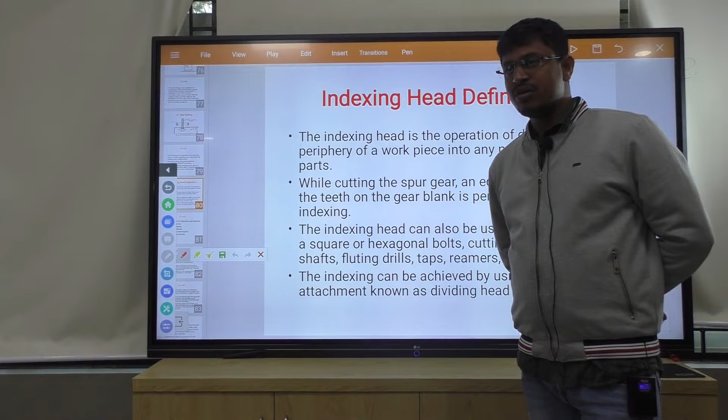Indexing method is used to divide the periphery of a workpiece into an equal number of parts. Why indexing is done, or what is indexing? Indexing means to produce any number of equal parts on the periphery of the workpiece. If we require an equal number of divisions on the periphery of the workpiece, then we go for indexing.

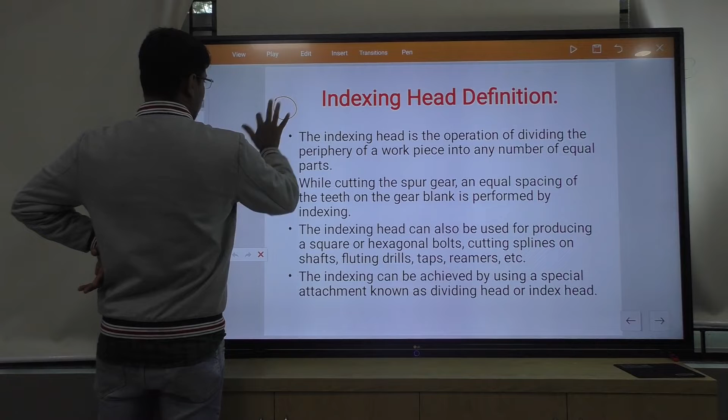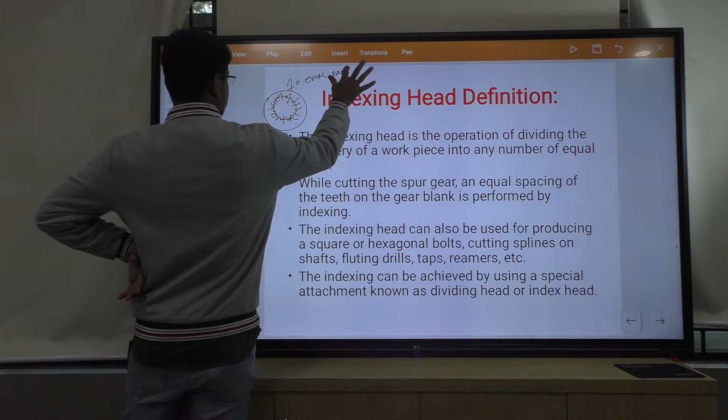The indexing head is used for dividing the periphery of a workpiece into any number of equal parts. That means if this is the circular workpiece, and we require to divide it equally, this is one part, this is one part, and so on. Here we have 10 equal parts. Equal parts means if we divide this workpiece into 10 equal parts, how should it be done?

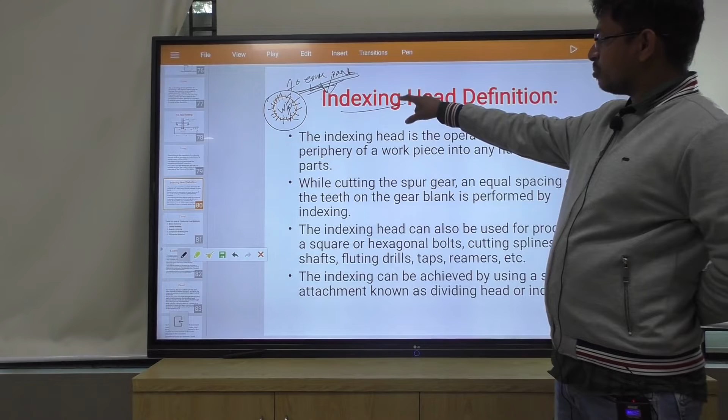By the indexing method, we can divide the workpiece surface or periphery into an equal number of parts. While cutting spur gears, an equal spacing of the teeth on the gear blank is performed by indexing.

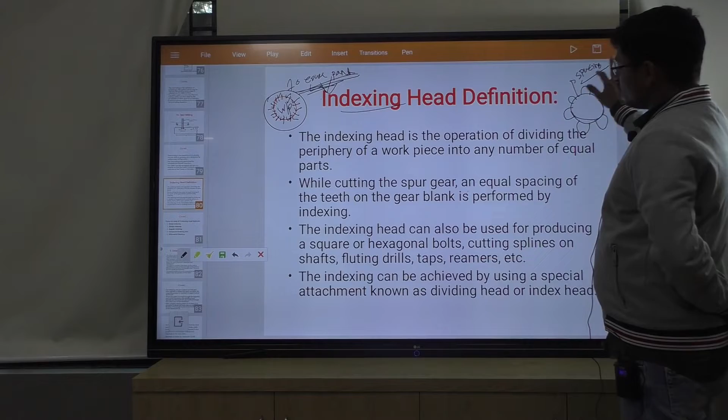Equal spacing means, if this is a spur gear and this is the number of teeth, then spacing is the gap between the teeth. The gap between the teeth is called spacing. The gap between consecutive teeth is called spacing.

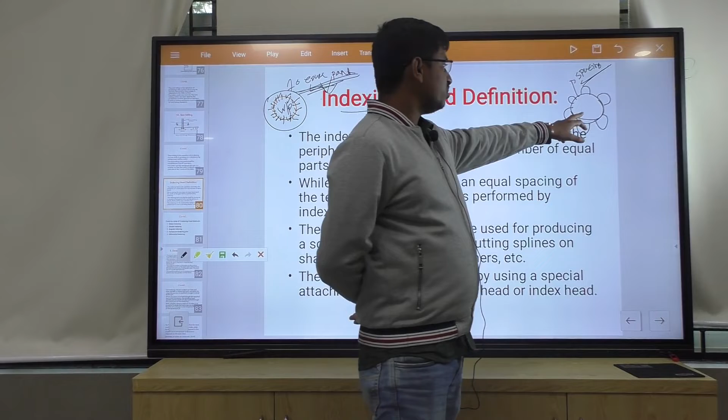In the preparation of the spur gear in milling machines, we have to divide the periphery of the workpiece, or the gap between the two teeth, into an equal number of spacings. So in this case also we have to go for indexing. The indexing head can also be used for producing square or hexagonal bolts.

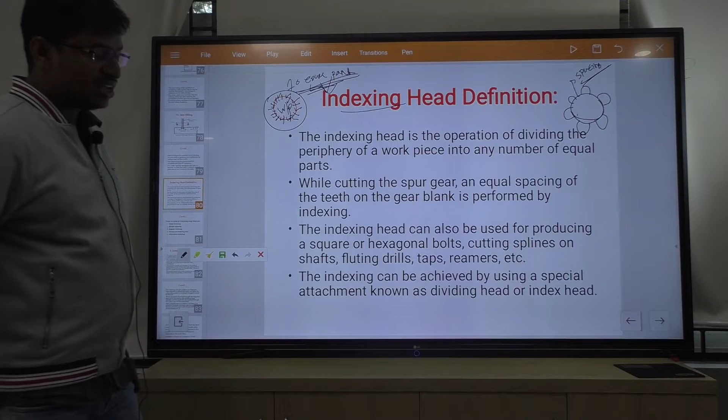It is used for cutting splines on shafts, fluting drills, taps and reamers. In this case also we go for indexing. Indexing can be achieved using a special attachment known as dividing head or index head.

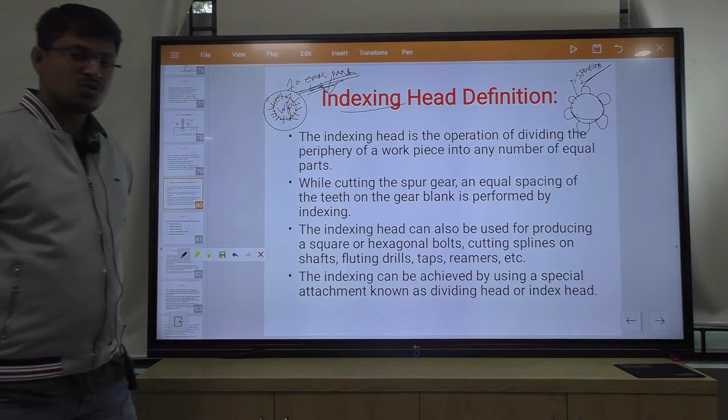We can divide the workpiece into any number of equal parts by attaching a dividing head or index head in the milling machine.

There are a total of 5 indexing methods: direct indexing, simple indexing, angular indexing, compound indexing, and differential indexing. But in our syllabus, only direct indexing, simple indexing, and compound indexing are present.

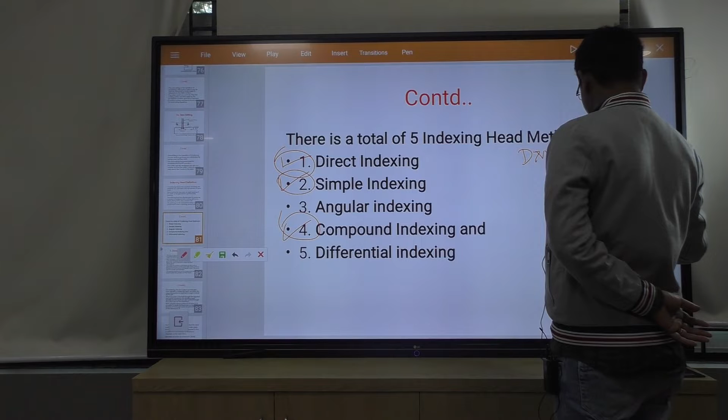For these indexing methods, we require a dividing head or index plate. The index plate is used in milling machines for dividing the workpiece into an equal number of parts.

There are 3 types of dividing head: one is the plain dividing head, second is the universal dividing head, and third is the optical dividing head.

By using this dividing head in milling machines, there are a total of 5 indexing methods: direct indexing, simple indexing, angular indexing, compound indexing, and differential indexing. But in our syllabus, direct indexing, simple indexing, and compound indexing are covered. We will discuss these one by one.

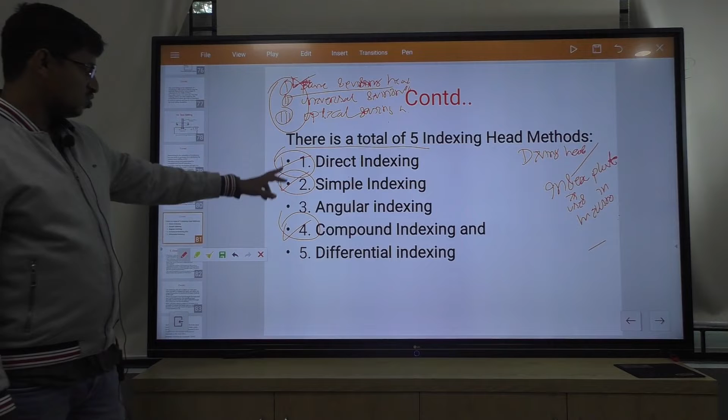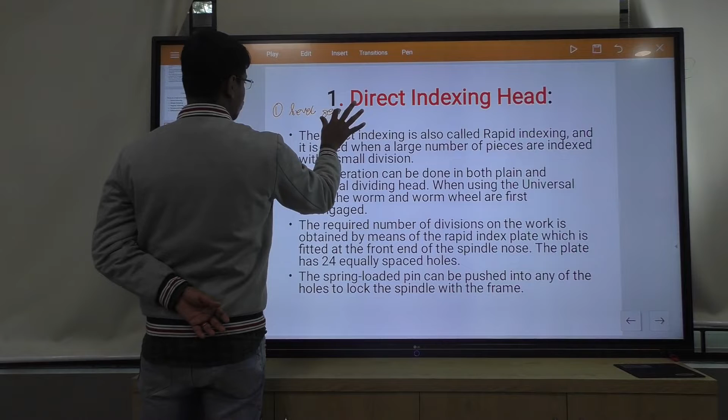Now we will see direct indexing. What is direct indexing? Direct indexing is also called rapid indexing, because in direct indexing we use a bevel gear arrangement. Direct indexing is used when a large number of pieces are indexed with a small division.

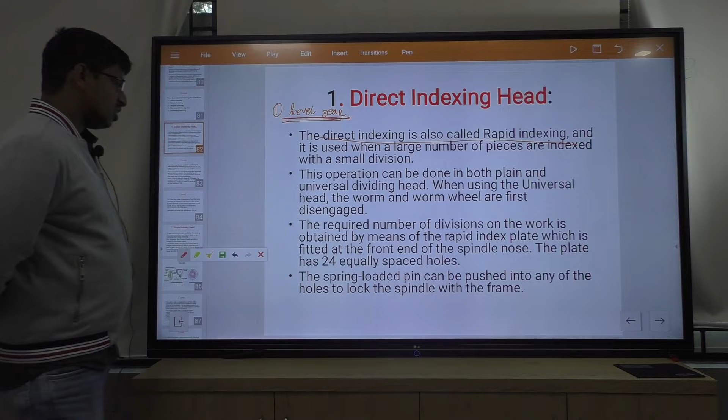These operations can be done in both plain and universal dividing heads. When using the universal head, the worm and worm wheel are first disengaged, and the required number of divisions of the workpiece is obtained by means of the rapid index plate, which is fitted at the front end of the spindle nose.

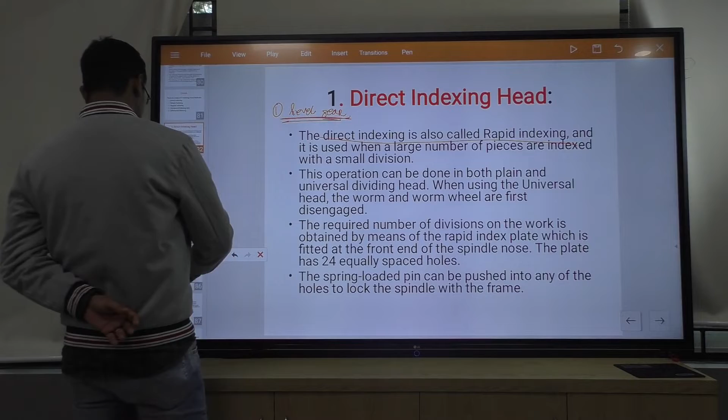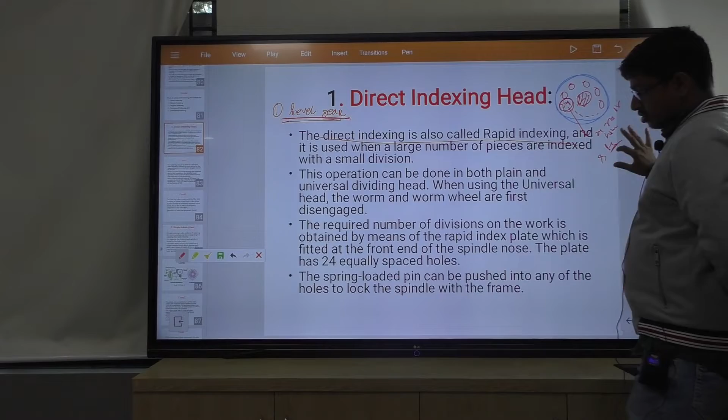In direct indexing, there is an index plate. These index plates have 24 number of holes. Simple indexing or direct indexing uses an index plate which contains 24 holes, and uses a bevel gear.

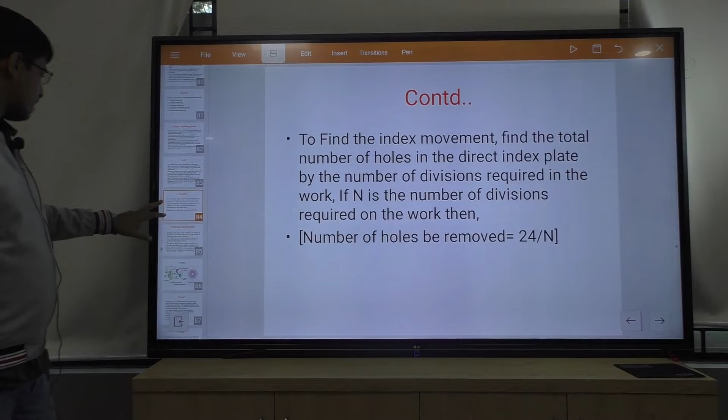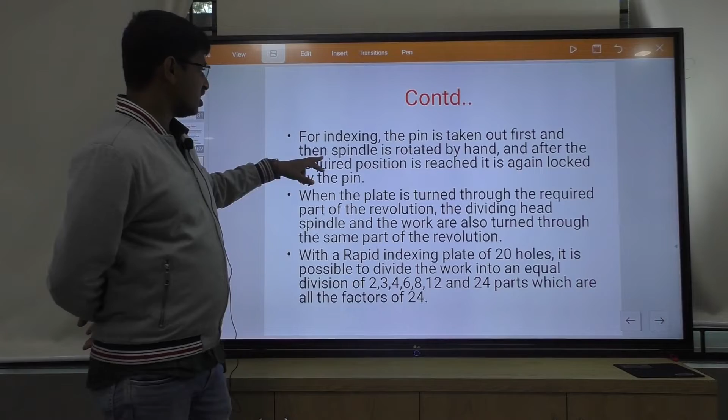For indexing the pin, first what happens? This is the index plate. What are the methods of indexing? How is indexing done in this direct indexing head? For indexing, the pin is taken out first and then the spindle is rotated by hand. This is the index plate, which contains 24 holes.

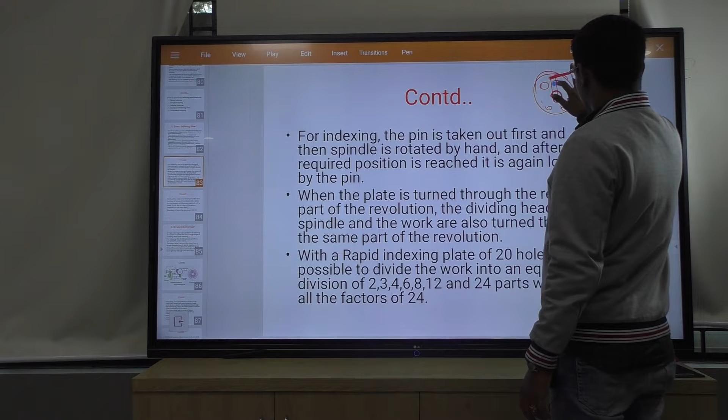And here the crank pin is present. First the crank pin is engaged with one of these holes. Then the crank pin is disengaged from this index plate and rotated by hand, and after the required position is reached, it is again locked by the pin.

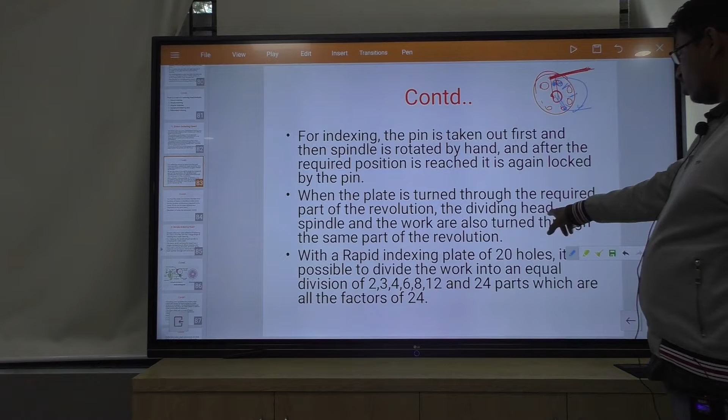Suppose we have to divide the workpiece into 3 equal parts. This is 1, this is 2, this is 3. After this rotation, the index crank is rotated and the index plate is locked in this hole. When the plate is turned through the required part of the revolution, the dividing spindle and the work are also turned through the same part of the revolution.

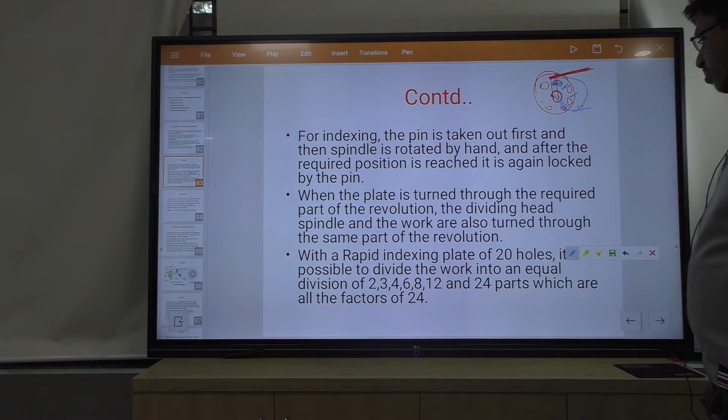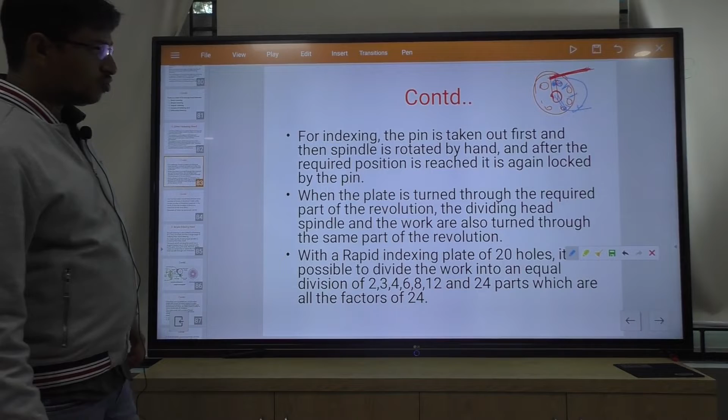With a rapid indexing plate of 24 holes, it is possible to divide the work into equal divisions of 2, 3, 4, 6, 8, 12 and 24 parts, which are all the factors of 24. In direct indexing, 24 holes are there in the index plate. With direct indexing, we can divide the workpiece into a number of equal parts that are factors of 24.

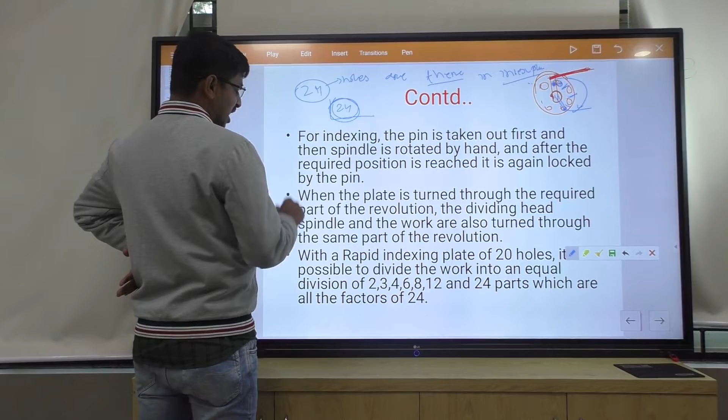What number of equal parts can we produce with direct indexing? 2, 3, 4, 6, 8, 12 and 24. We can divide the workpiece into 2, 3, 4, 6, 8, 12 and 24 equal parts by using direct indexing, all the factors of 24.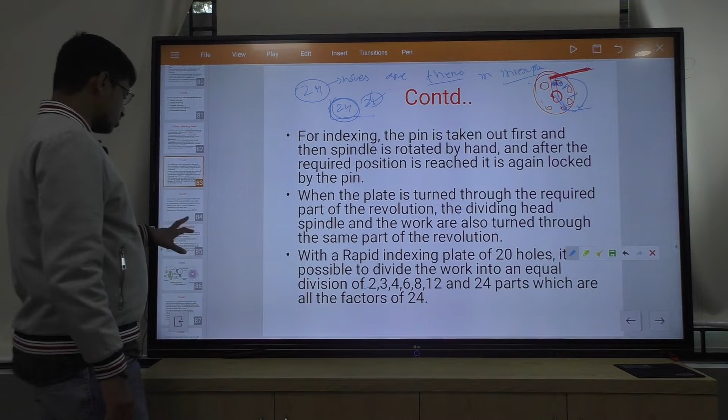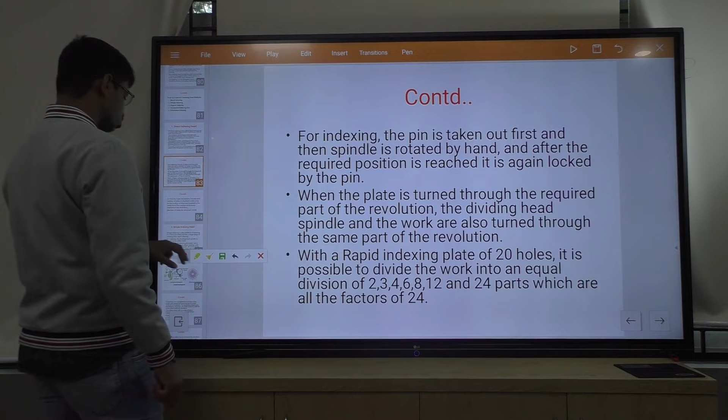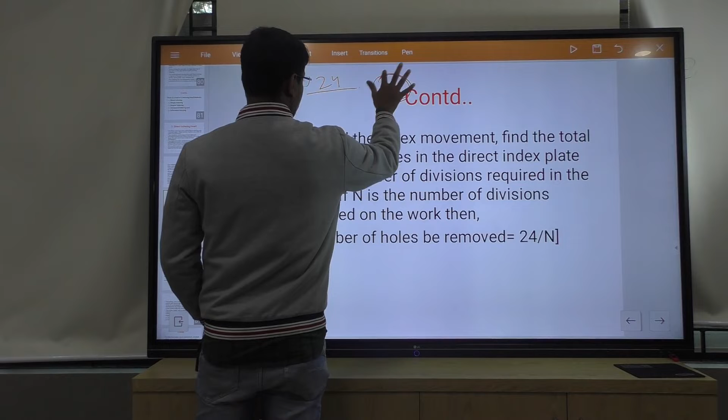Then it's simple. To find the index crank movement, divide the total number of holes in the index plate by the number of divisions required in the work. If n is the number of divisions, here we have 24, and suppose we have to divide this circle into 6 equal parts.

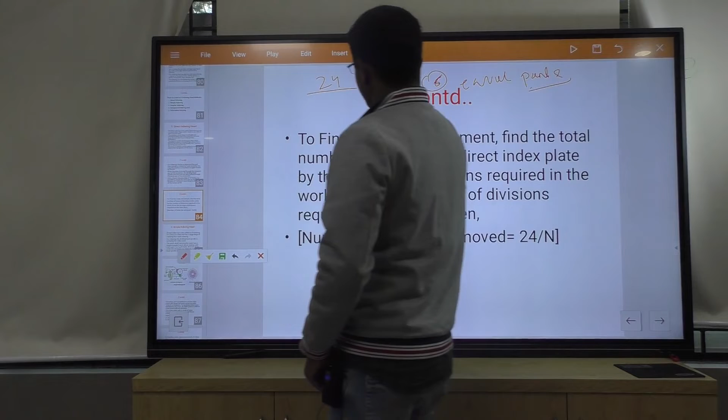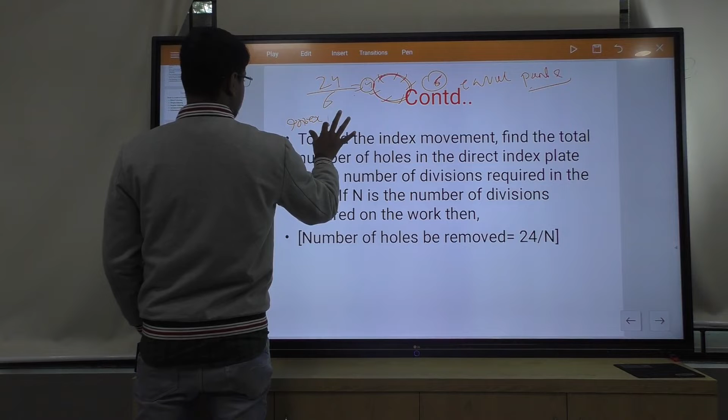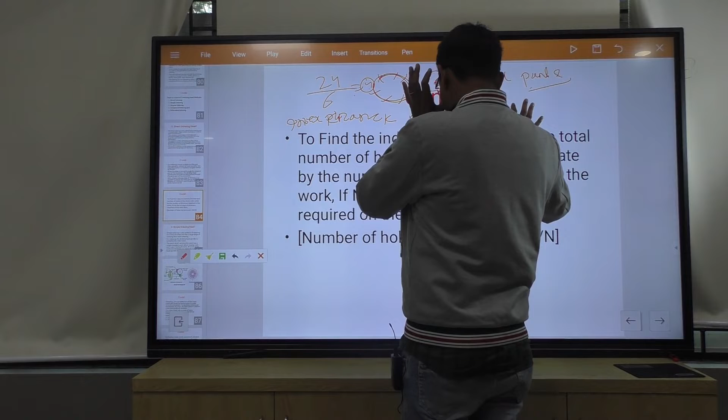What happens? 24 by 6 is 4, so this index crank rotates 4 holes of the 24 hole circle plate. If there are 24 holes, 4 holes are to be covered to produce 6 equal parts.

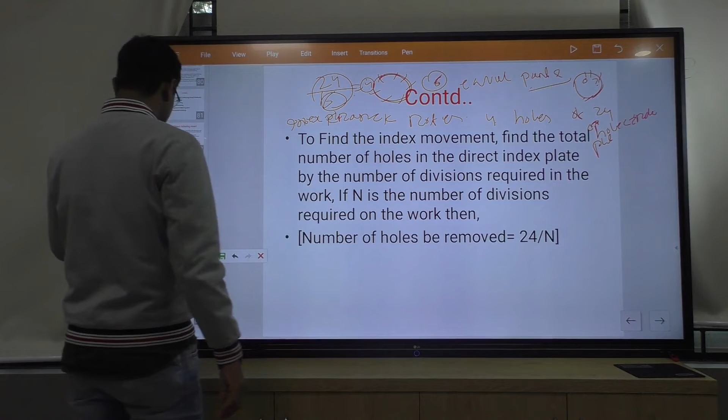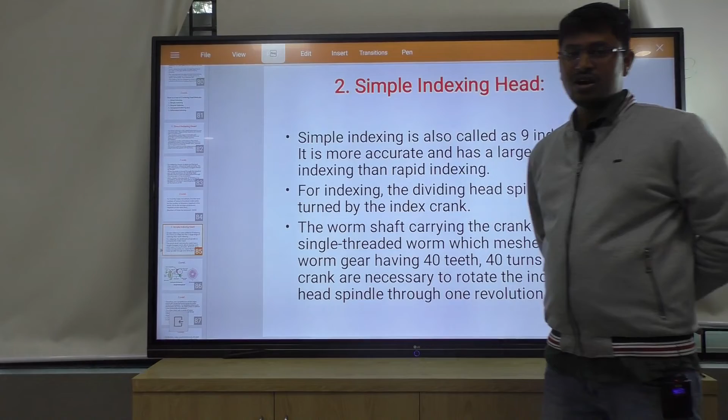Then we go for simple indexing. This is direct indexing. What are the limitations of direct indexing, and why should we go for simple indexing? Because in direct indexing we cannot produce any number of equal parts. The equal parts are produced only with the factors of 24. For this reason, we go for simple indexing.

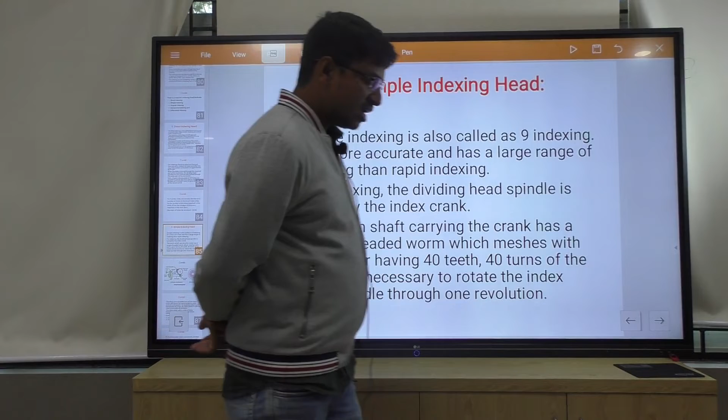Simple indexing is also called plain indexing. It is more accurate and has a larger range of indexing than rapid or direct indexing. For indexing, the dividing head spindle is turned by the index crank. In the simple indexing head, a worm and worm wheel is used to produce equal parts. The worm wheel has 40 teeth.

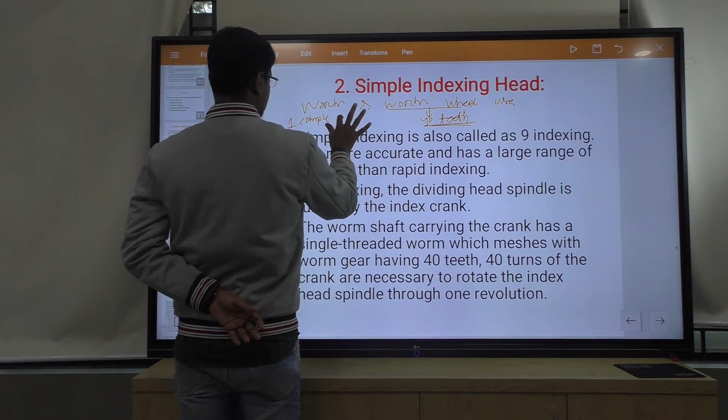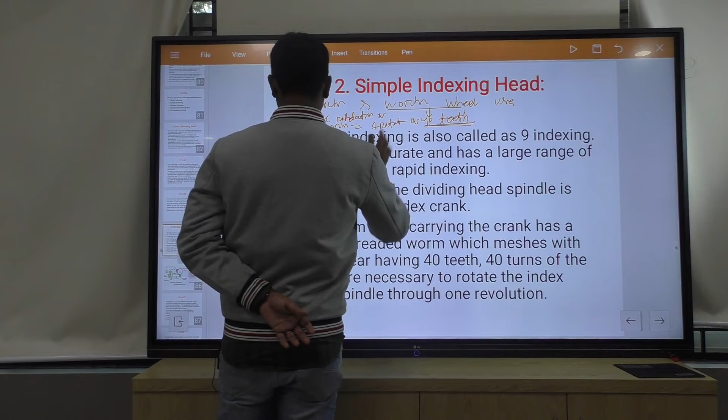In the worm and worm wheel, this worm wheel has 40 teeth. One complete rotation of the worm equals one tooth, 1/40 rotation of the worm wheel. If we rotate the worm one rotation, the worm wheel rotates 1/40.

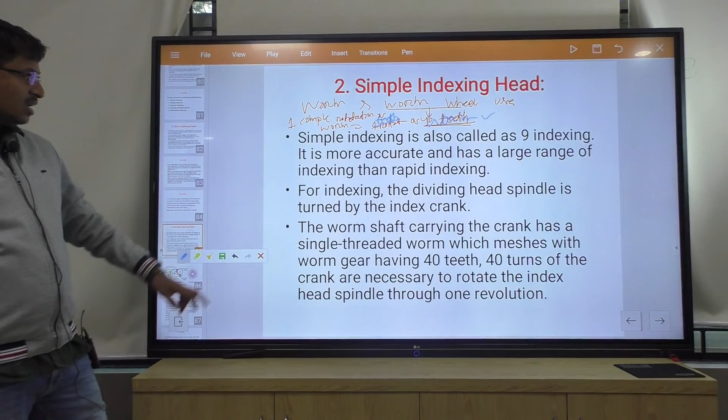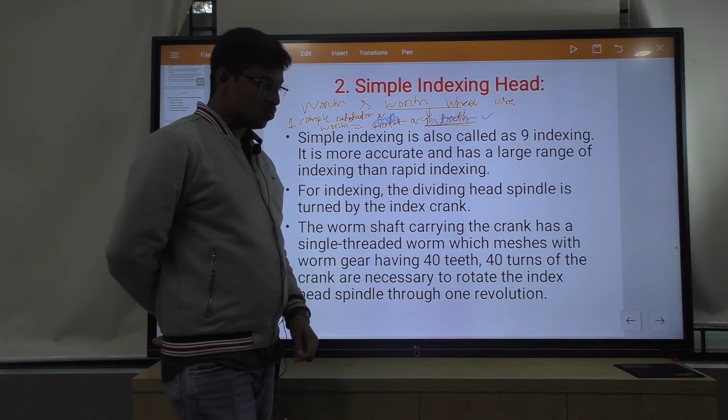The worm shaft carrying the crank has a single threaded worm, which meshes with the worm gear having 40 teeth. 40 turns of the crank are necessary to rotate the index head spindle through 1 revolution, so 40 turns of the worm are required to completely rotate the worm wheel, and 1 rotation of the worm is 1/40 of the worm wheel.

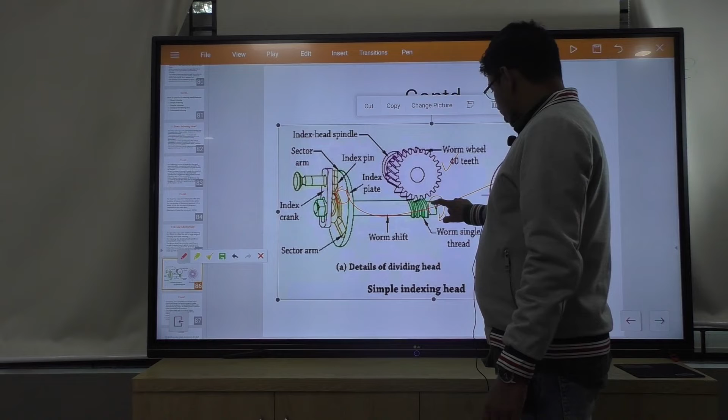These are the details of the dividing head. This is the simple indexing head. This is the arm for locking, and this is the index plate. This worm wheel has 40 teeth. If the crank is rotated once, 1 tooth of the worm wheel is rotated. This is the index plate containing different circles.

Therefore, 1 complete turn of the index crank will cause the worm wheel to make 1/40 of a revolution. To facilitate indexing to fractions of a turn, an index plate is used to cover practically all numbers. The index plates with circles of holes manufactured by Brown and Sharpe, plate number 1: 15, 16, 17, 18, 19, 20. This is one plate. This is the simple indexing head.

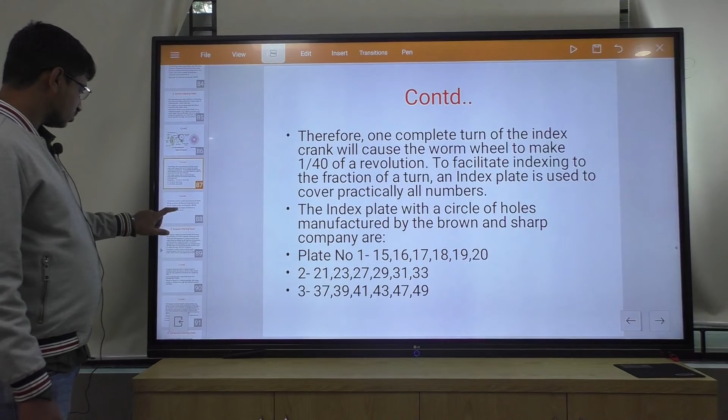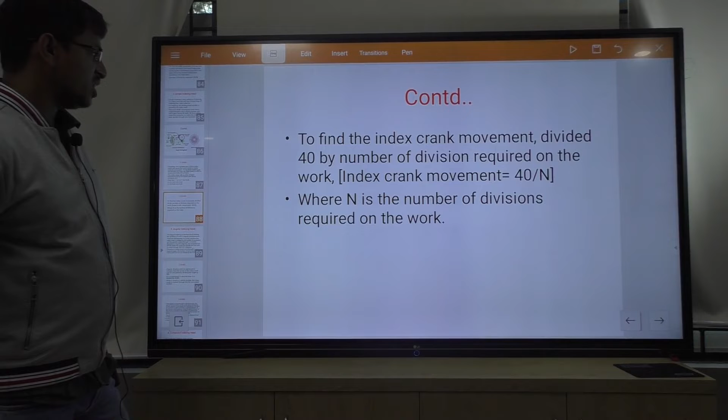To find the index crank movement, divide 40 by the number of divisions required on the work: index crank movement equals 40/n, where n is the number of divisions required on the work.

Suppose, for example, we have to divide this workpiece into 10 equal parts. So we have to divide 40 by 10, which means 4 whole circles. It means the index crank will cover 4 whole circles.

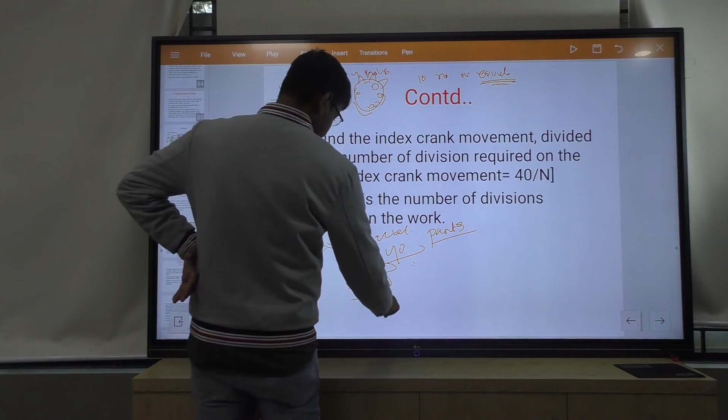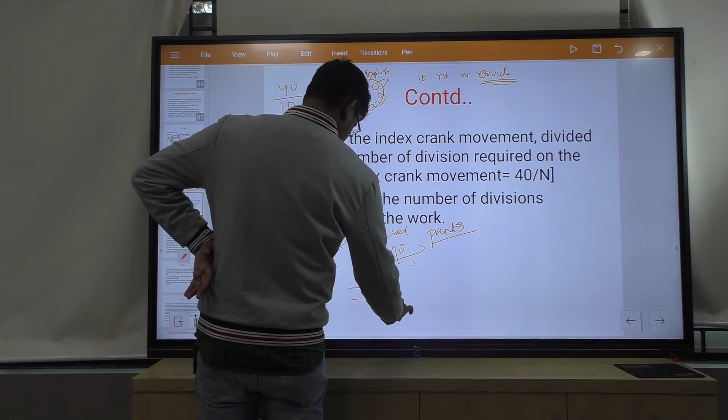Suppose we have to divide this workpiece into 3 equal parts. Then what happens? We have to divide 40 by 3. This gives 13 and 1/3.

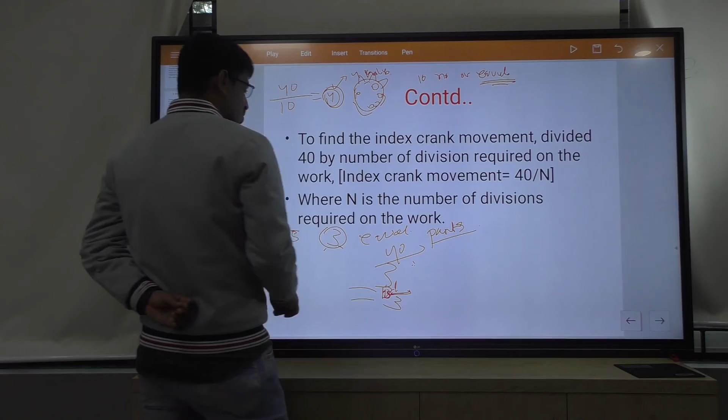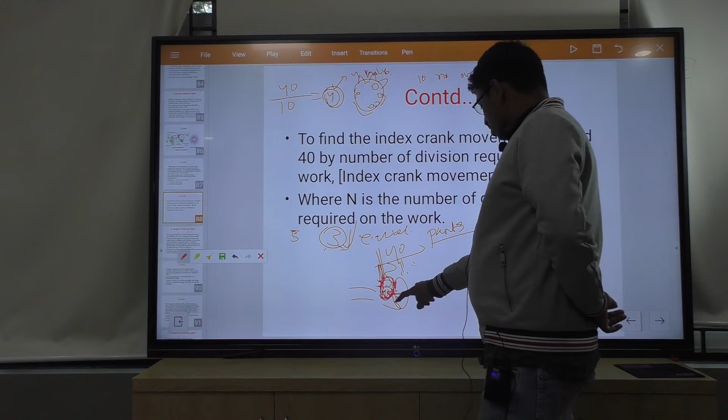Now, to produce 3 equal parts on the periphery of the workpiece, we have to move the index crank 13 complete rotations. Then we have to find this 1/3 rotation, which is not complete. For this 1/3, we have to multiply a common number in the numerator and denominator, so that we get an available hole circle.

Suppose we have a 12 hole index plate. If we multiply numerator and denominator by 2, it gives 2/6, and a 6 hole plate is not available. Then we multiply by 3: 3/9, and we do not have a 9 hole index plate. Then we go for 4.

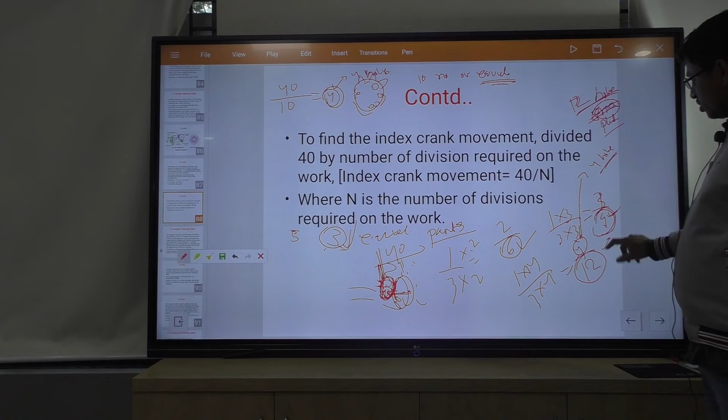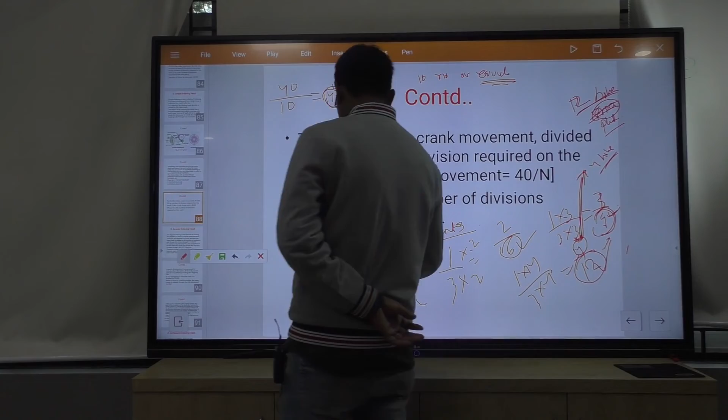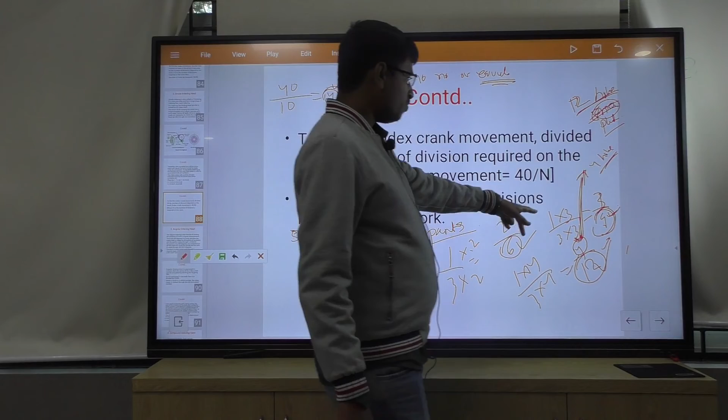1 into 4 divided by 3 into 4 gives 4/12, which means in a 12 hole index plate we go for 4 holes. So to divide the workpiece into 3 equal divisions, we need 13 complete rotations of the index crank and also 4 holes in the 12 hole index plate.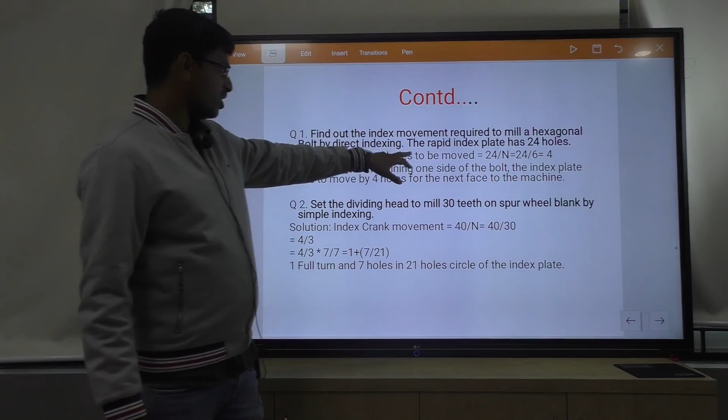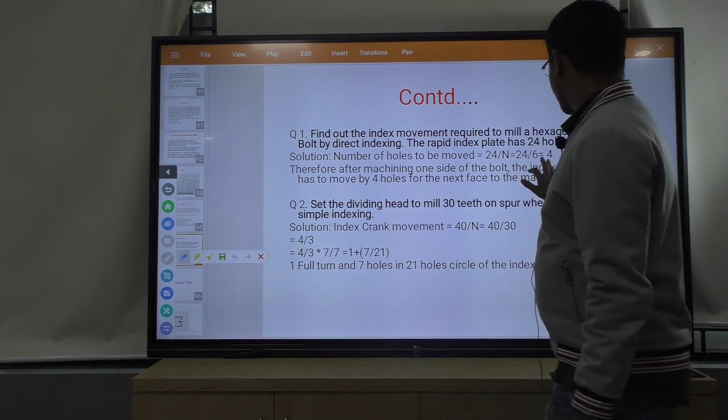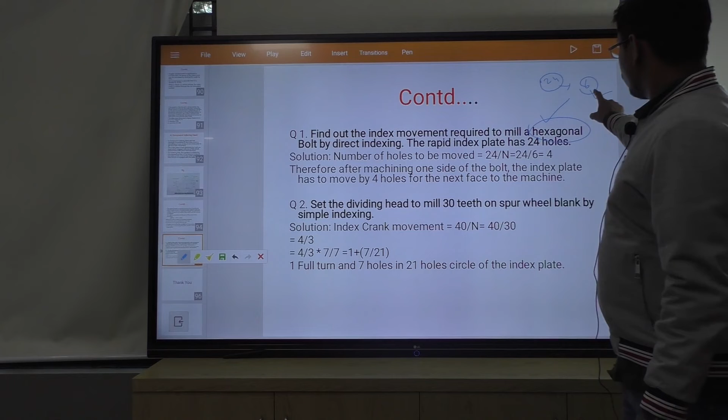This is one numerical. Find out the index movement required to mill a hexagon bolt by direct indexing. The rapid index plate has 24 holes. Here we can use direct indexing. Why? Because for a hexagon, 24 has a factor 6, so we can directly go for 6 divisions on the 24 hole plate.

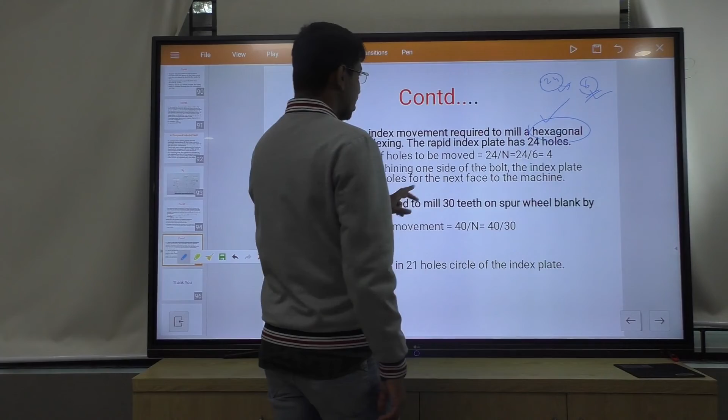Then set the dividing head: 24 by 6 means 4 holes, so in a 24 hole index plate the index crank should cover 4 holes to find 6 equal parts.

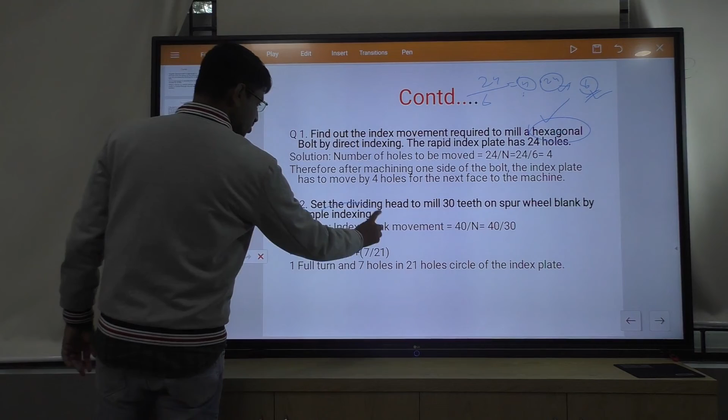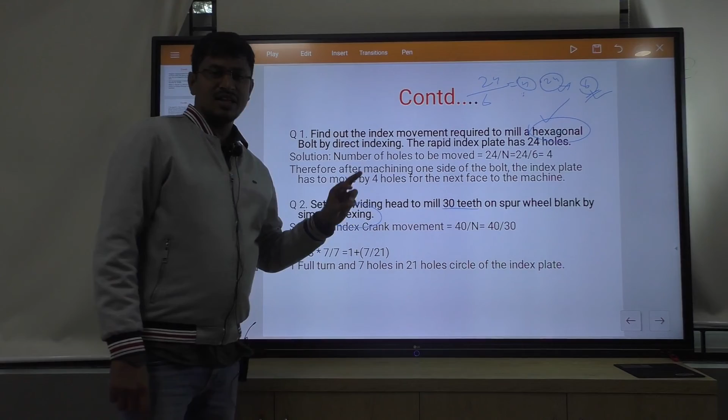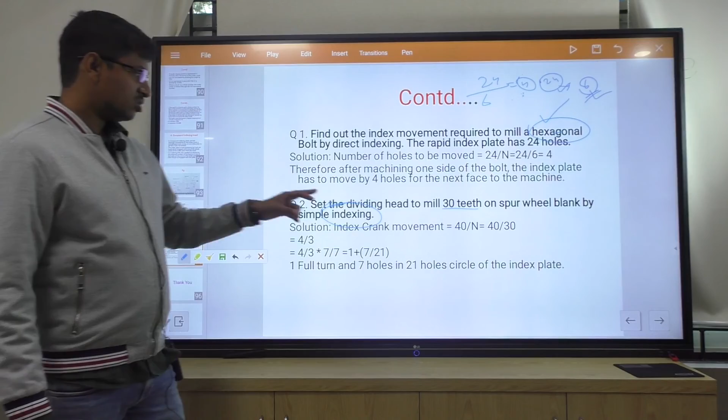Another example: set the dividing head to mill 30 teeth on a spur wheel blank by simple indexing. To produce 30 teeth, 30 equal parts should be produced on the periphery. We know in simple indexing the worm wheel contains 40 teeth.

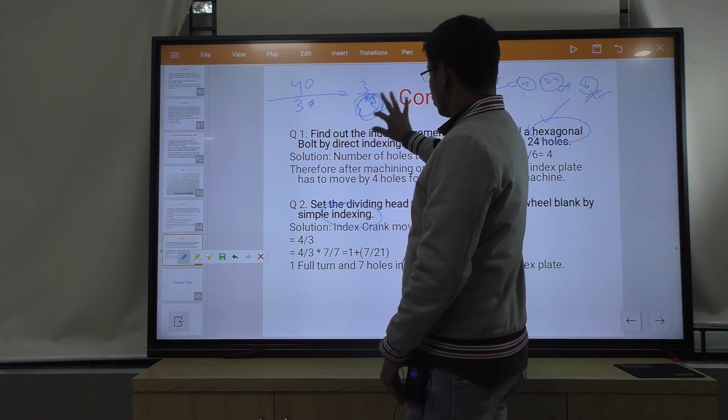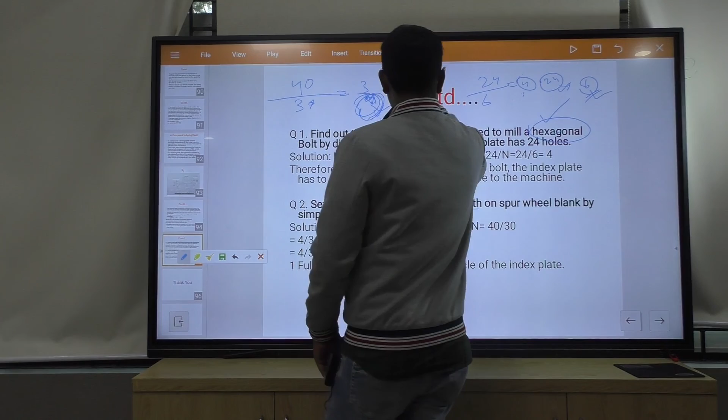So we divide 40 by 30, which is 4/3. But we do not have a 3 hole index plate. So this 4/3 can be converted into 1 and 1/3, meaning 1 full rotation of the index crank and this 1/3. This 1/3 should be converted to an available index plate.

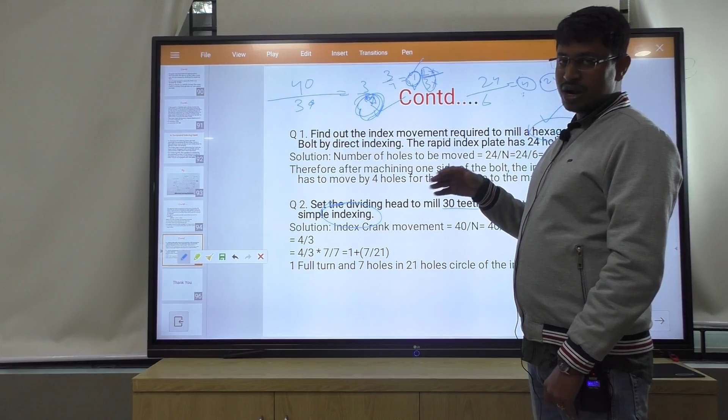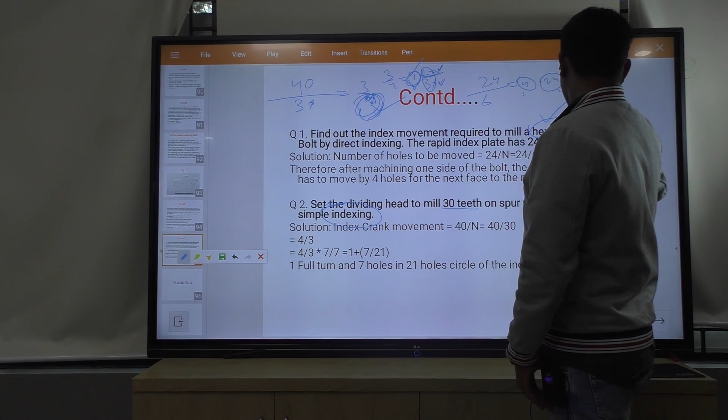Then we should see what index plate is available, and as required, multiply the same common number in the numerator and denominator to find the available index plate. Suppose we have a 21 hole circle available. If we multiply by 2, 2/6 is not available. 3/9 not available. 4/12 not available. 5/15 not available. 6/18 not available.

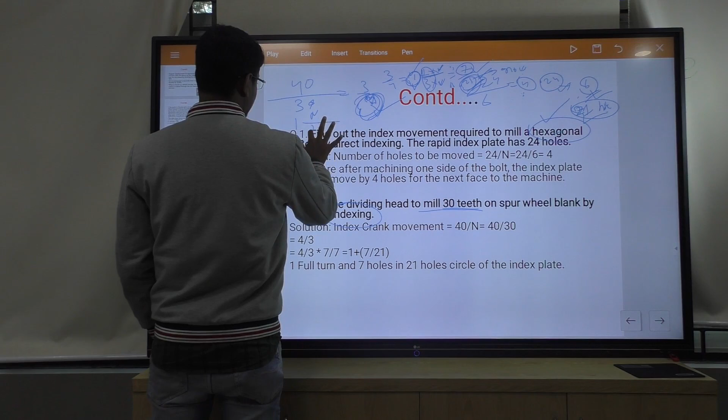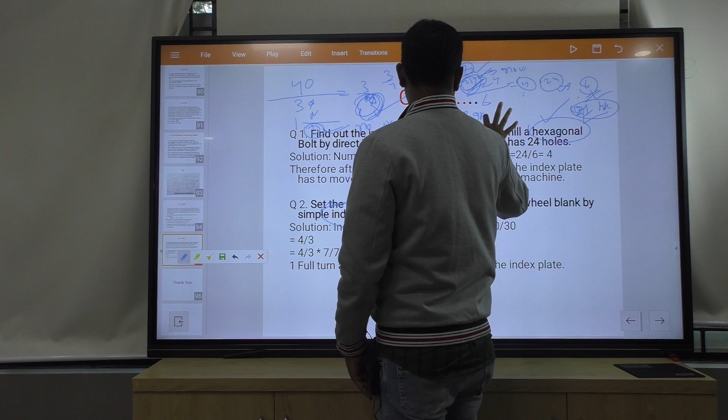If we multiply by 7, we get 7/21, and a 21 hole circle is available. So in the 21 hole circle index plate we have to cover 7 holes to get these 30 equal divisions. The numerator is the number of holes to move, and the denominator is the number of holes in the hole circle of the index plate.